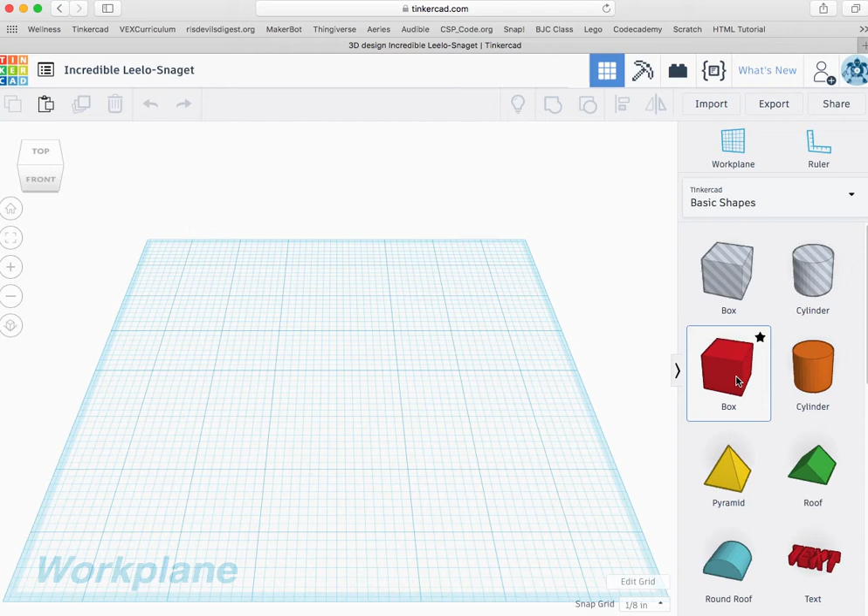So I'm going to come over here, the base, all I need is a square. I'm going to grab this box and bring it onto my grid. I'm going to click directly on it. Actually, you know what I'm going to do? I'm going to take you on a tour of this box right now, so you get to practice using the view cube.

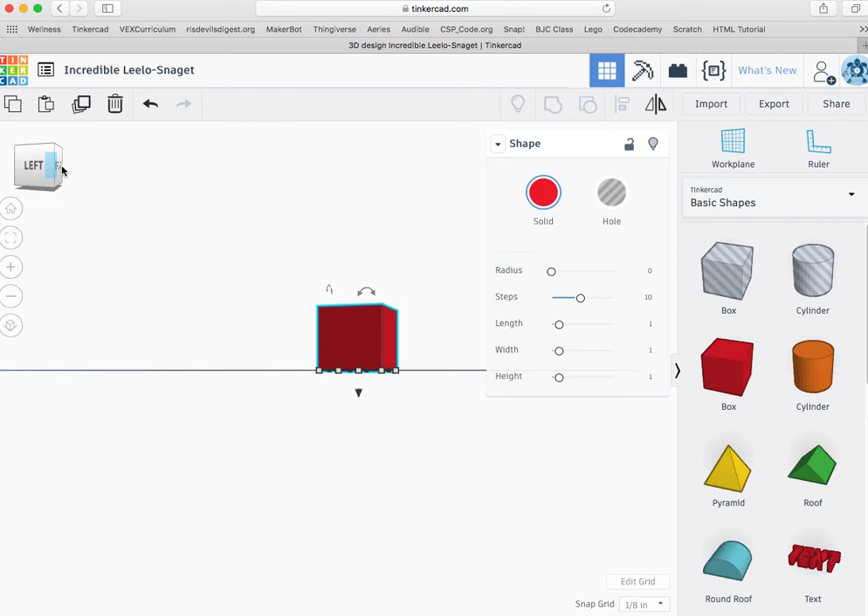So I'm going to go top. I'm going to go back down. I'm going to come down one more time. I'm going to go over to the edge. And so this is all it is, it's the exact same thing. I'm going to go back up to the right here.

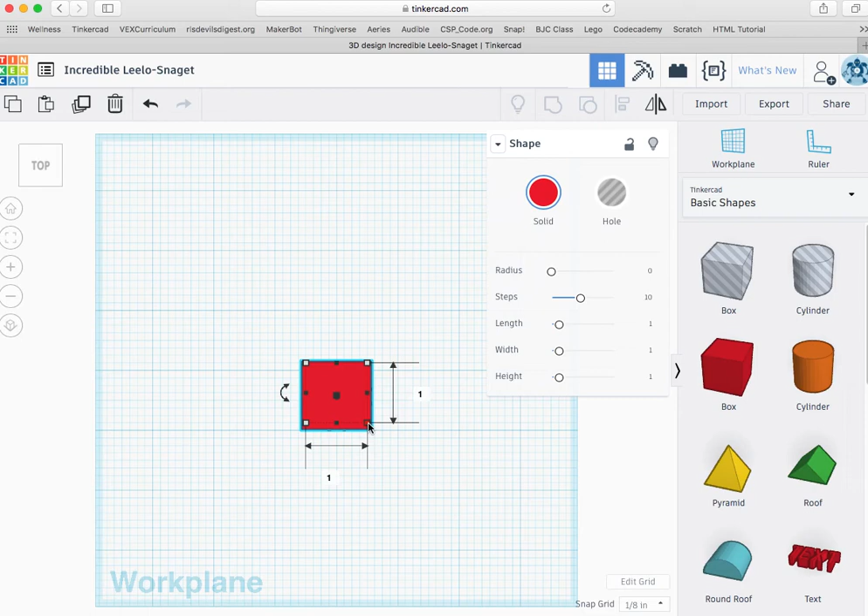How about top? And I'm going to say, here's width. So if I'm looking at my thing for the base, I have width 1 inch, length 1 inch. I need to shrink it to 0.062. So when I click on this, it already has the 1 and 1. All I need to do is bring it down to the side and shrink this here to 0.062.

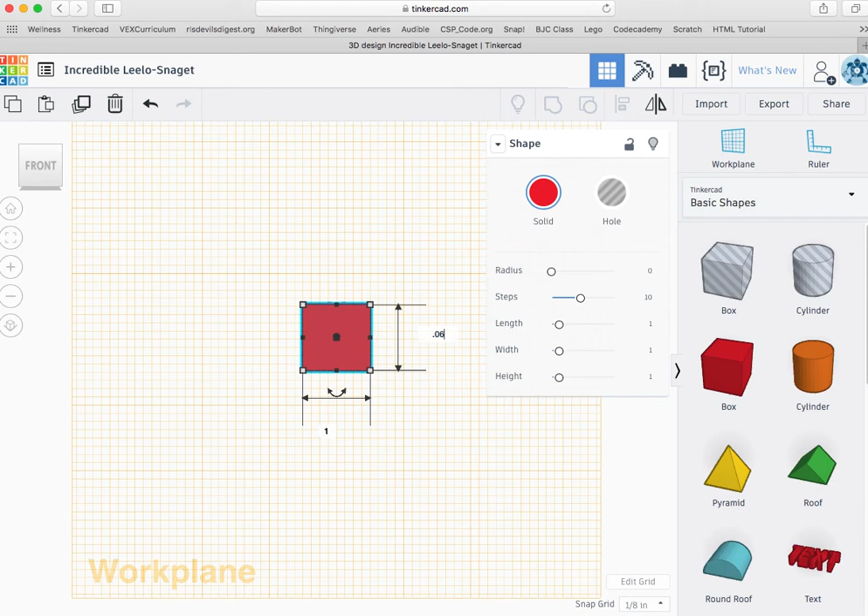So I'm going to come over here, grab my work plane, and create a new plane. I'm going to click on this flat surface here of the square, and now my new plane will come up directly behind this cube. There it is. And now, instead of this saying 1 - so I clicked on a white square - I come over here and I'm going to type into it 0.062. Enter, there it is. And now I'm going to go back up to my top and redo my plane.

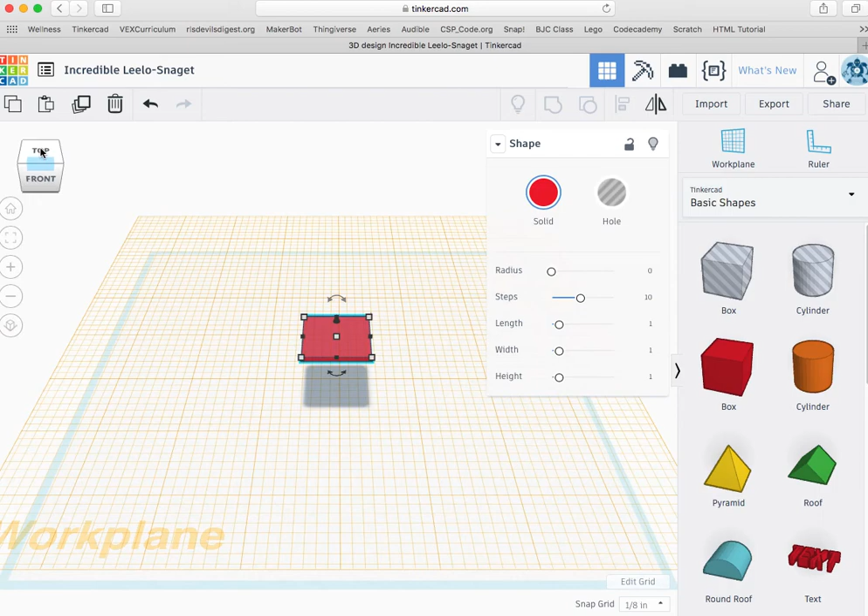And now I have - there's my 1 inch of width, here's my 1 inch of length - and when I go down to look at the height of it, that everything's going to be sitting on... come on, I'll go up just one more, there it is. That guy there on the side, he's 0.062 now, that width right there.

I'm going to actually come in here, click on the work plane, come on, and right there, and I'm going to zoom in. And if I click on this, there it is. It's exactly what I want.

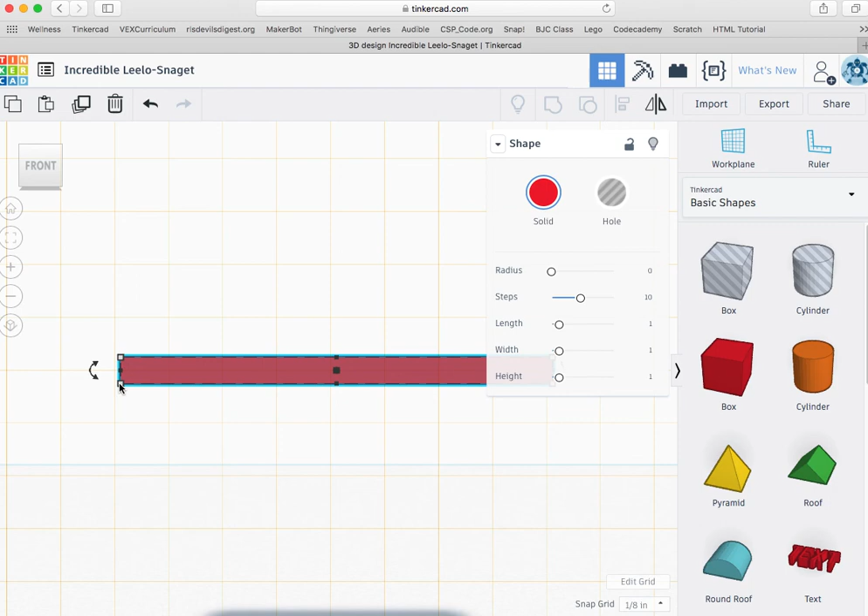So now I'm going to go ahead, and that's it, my base is done. So how about I go up on top again and I just leave it and go work plane like that. And I back out just a little bit, and now I'm on to the next step, which is building a cube onto the base.